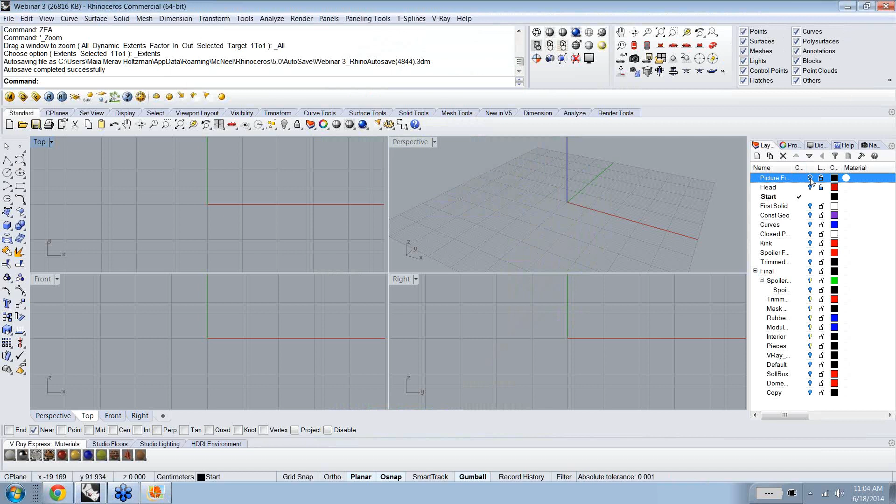I'm going to go ahead and jump into my Rhino file right now, and I'm just going to move this over because it's a little bit distracting. All right. So the first thing that I've done here is I've set up my picture frames, which, if you've seen my webinars in the past, you know that I like to do. I like to model using a reference point, even if it's a sketch or something like that. And for this particular exercise, we are going to be doing some solid modeling using deformable shape.

So I'm going to start in my right view here. I'm going to open up this viewport, and I'll go to my solid creation menu here, and I'm going to create a sphere, center radius, from 0. The sphere is going to have a radius of 43.

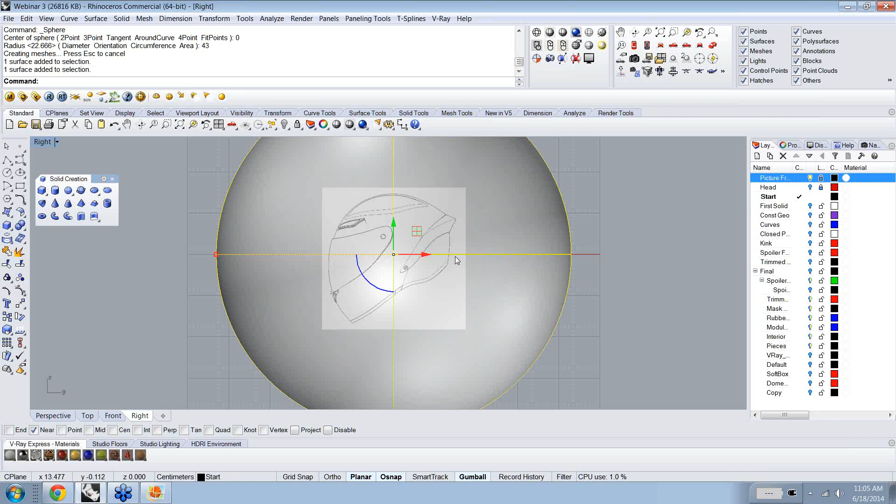And you'll see that I just created this sphere with that particular radius, and if you notice, I have a seam running along the right-hand side of the sphere. So before I do anything else, I'm just going to rotate that sphere 45 degrees, and I'm going to scale it down to approximately the size of my helmet. So something like that for now. Just bring it in a little bit more, not like that.

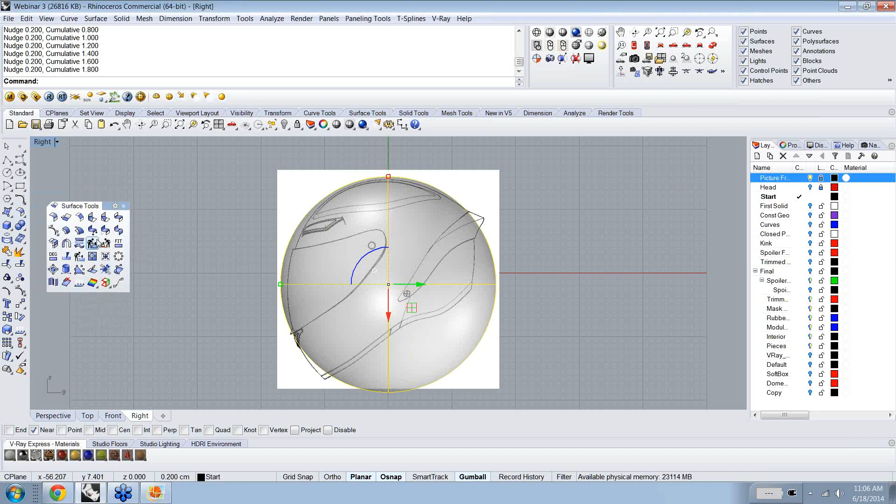I'm going to rebuild this sphere now in order to make it deformable. So either in my surface tools menu here I can rebuild, or I can just type in rebuild. And I'm going to assume that you guys don't need me to tell you where the icons are for this webinar, because otherwise we will get really bogged down. But in order to make this deformable, I'm going to change the degree of curvature here from 2 and 2 to 3 and 3.

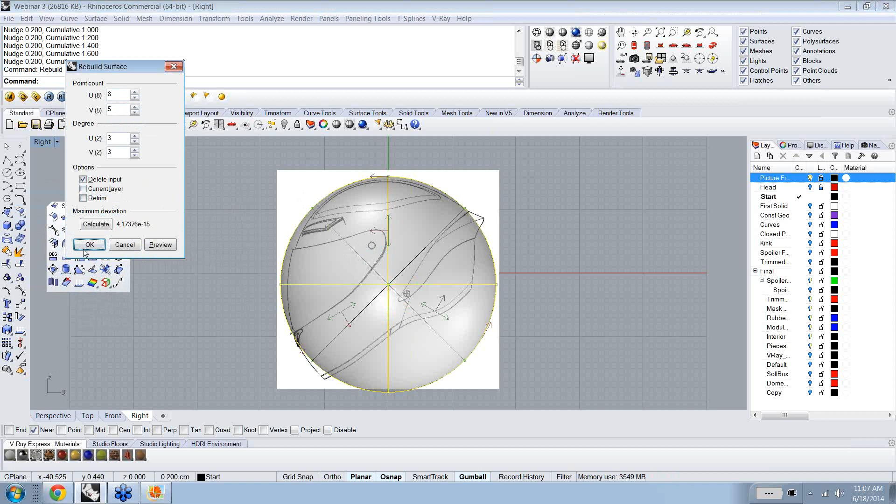And for the point count, I'll leave the point count at 8 and 5, and I'll see what happens in terms of adding points as we go. So I'll say OK now. And then I'll hit F10 to turn on my surface points here. So the first thing I'll do now is toggle my front tab to go into the front viewport, and I'm going to start deforming this shape.

And the initial thing that I want to do before I start trying to model it is I want to move this seam that I've placed at the bottom completely out of the way of what I'm going to eventually be modeling. So I'm going to select all of those control points there, and with my gumball on, I'm just going to drag them down and away from my shape.

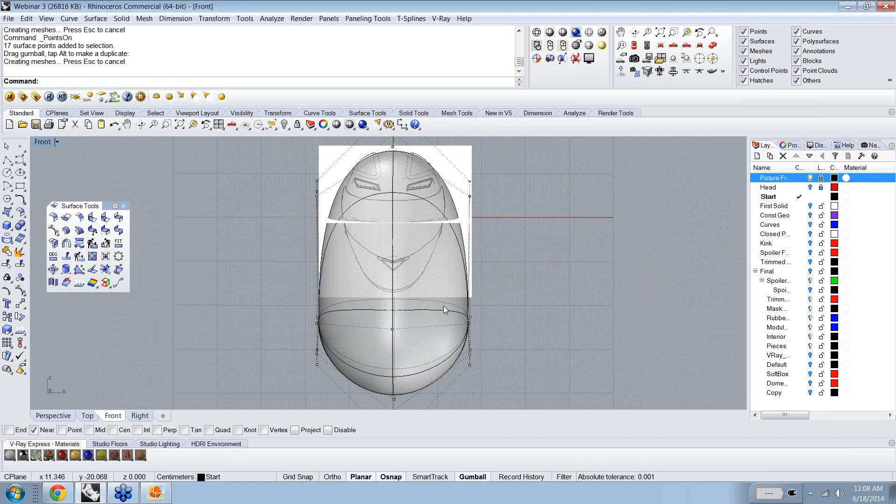So basically what I'm doing is I'm limiting this seam's interference with the surface modeling process. The seam can make little indentations and strange results, and I don't want that to happen, so I'm moving it away. That may be a little far. Sometimes you might want to move it only slightly down. But once I've got that moved down like that, then I can grab these and I can start to scale my shape in a little bit.

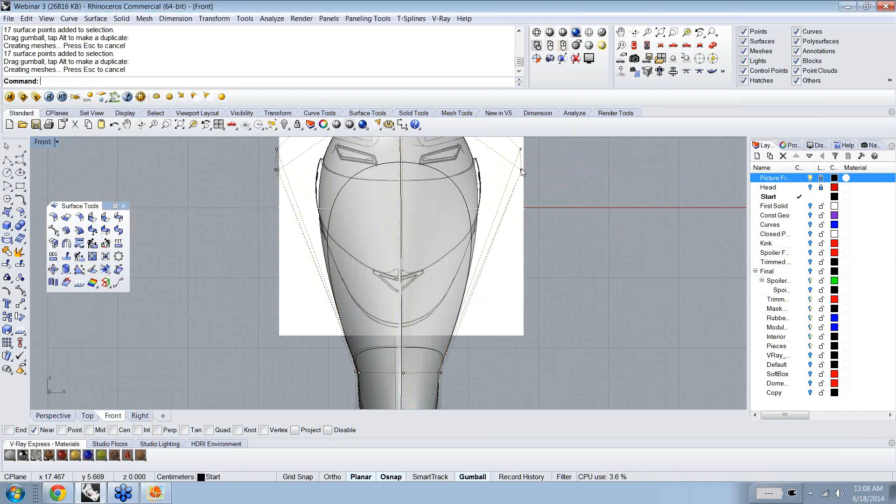I can go ahead and maybe move these down a touch like that. And then I can adjust the top pieces like this. Right. And you can see how quickly we start to get the shape that I'm trying to achieve. I mean, it's pretty amazing how quickly that happens.

Now if I toggle the right viewport tab here, and make this plan view again, we can start doing the same thing in the right view. So I'm using my scale handle on my gumball here to adjust the points that will become the basis for the shape of this. And when I get to a point where I no longer have as much control over this shape as I'd like, the next thing I'm going to do is insert a knot, which is going to add some information to this surface and make it a little bit easier to adjust.

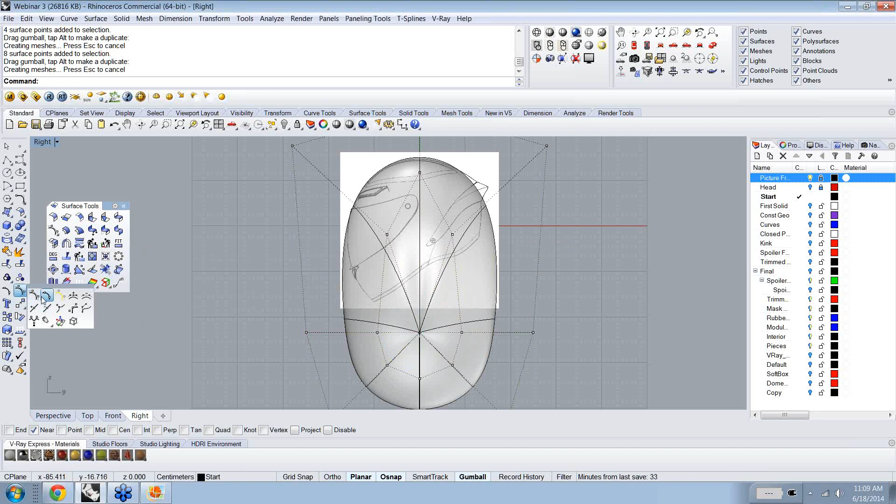So I'll go to insert knot, and I'll select my surface. And you see that right now the knot is not actually going in the direction that I'd like it to go in. So I'm going to toggle that knot. And now you see that it's going to run along the surface here. And I'm going to click once there and maybe again over here, hit enter.

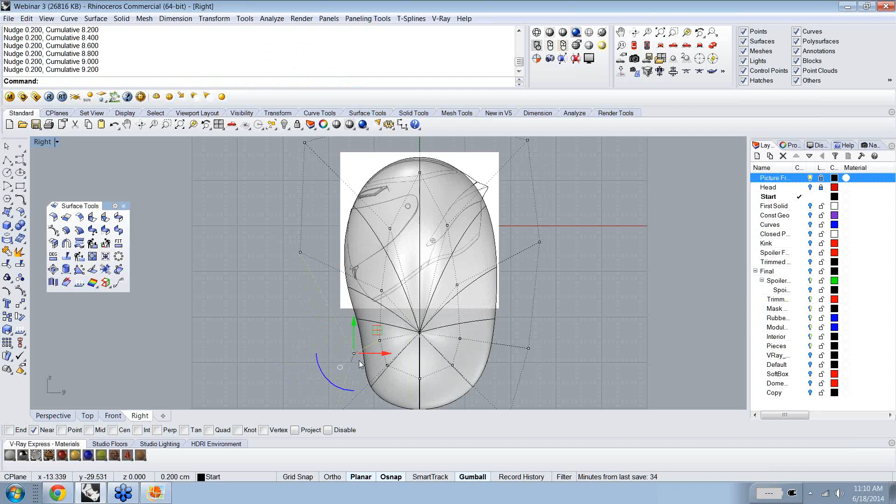And now, because of those knots, I can start to drag the surface in, and the original control point is holding itself away from the surface so that I can adjust the surface even more carefully like this. Okay, so it's pretty cool actually. I think a lot of people have a tendency to think of Rhino as being really limited when it comes to this kind of mushy modeling, and it's not. We can really do a ton of stuff.

So at this point, I'm going to pop over into my first solid layer, which I've already prepared here, just because of the time constraints. So I'm going to escape out of my control points.

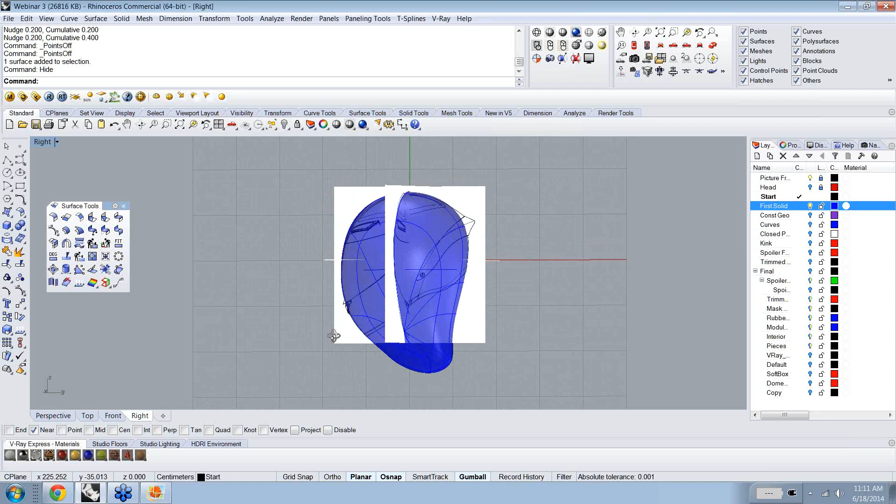I'll hide this, and I'll turn on my first solid. And you can see actually that in this case, my final result looked like this. Let me change the color so you guys can see it a little bit better. Let's make it blue. So this is my first solid. And you can see I've really gotten pretty close to the shape of this helmet. And what we're missing now is this little back end here.

So before I do anything else, I'm going to insert not a knot anymore, but now a kink, which is going to allow me to make a crease in my surface. So I'll go back into my points on menu here, point edit, and I'll go to insert kink, and I'm going to select my surface again. And again, I'm wanting to insert it in the opposite surface direction, so I'll toggle. And I'm just going to put it right about there and hit enter. And I can see that it's right here.

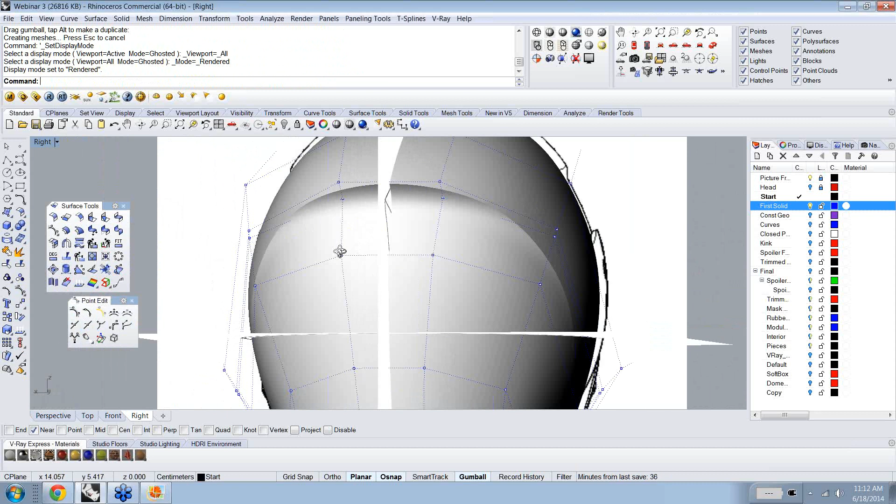Now I'll turn on control points for my surface. And you can see that if I window select this point and I start to drag it, now instead of getting that nice smooth shape that we were getting before, I'm actually getting a crease. And if we look at this in the rendered view, just for the sake of understanding what's happening here, you can see that I'm pulling control points and it's giving me this really lovely definition here. I mean, this is so much fun for making all kinds of stuff, particularly industrial design shapes.

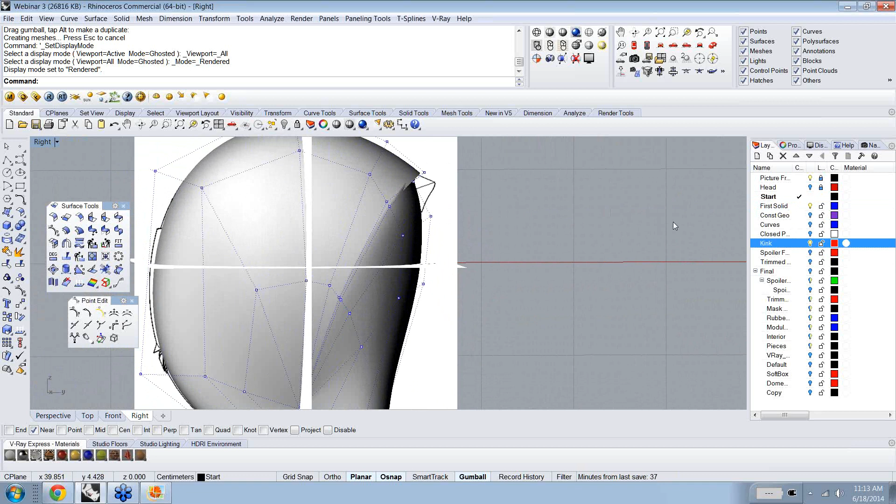And you can see that because I didn't grab all of the control points, it starts to diminish in terms of the crease as it goes down on the surface here. So that's basically where I would leave this. In the case of making this for real, I would have copied this because I also need to create this portion here of my helmet, which is a separate element. So I'm going to go into my next part of this. This is the kink that I created for the actual webinar here, and it has a little bit of roundness at the end. And it's a little bit more defined as it goes down.

And now I'm going to turn on my spoiler surface. So what I did was I took two surfaces from the original rounded shape. I made one kinked surface that was just like this, and from the second copied surface I made another spoiler surface that looks like this. So let's turn off the kink for a second. Let me go back into my ghosted display mode so we can see what we're talking about here. I have this surface here, which is going to be used only to make the spoiler, which is this plastic element that goes on the back of the helmet.

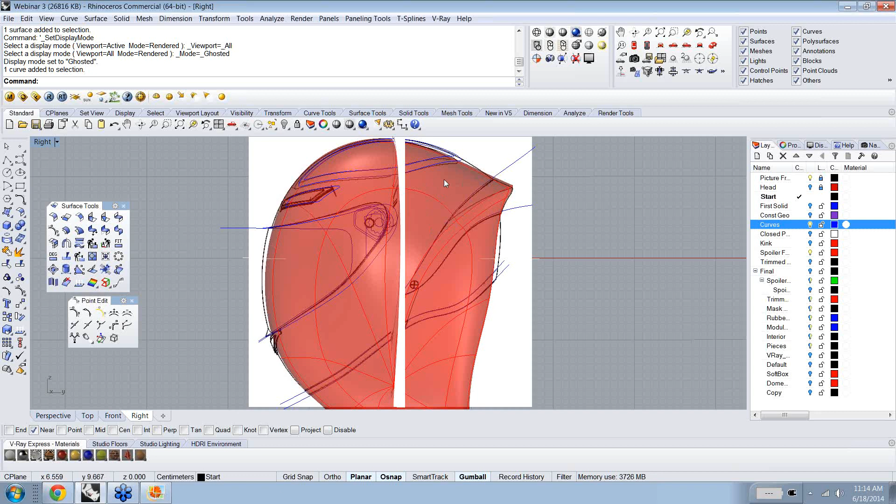And at this point, I'll start turning on my curves layer. I have all my curves in place here. You can see that this is my curve that I'm going to use to trim away the excess from this exterior portion of the helmet. So I'll select this, and I can now turn off my picture frame. I'll select this curve here.

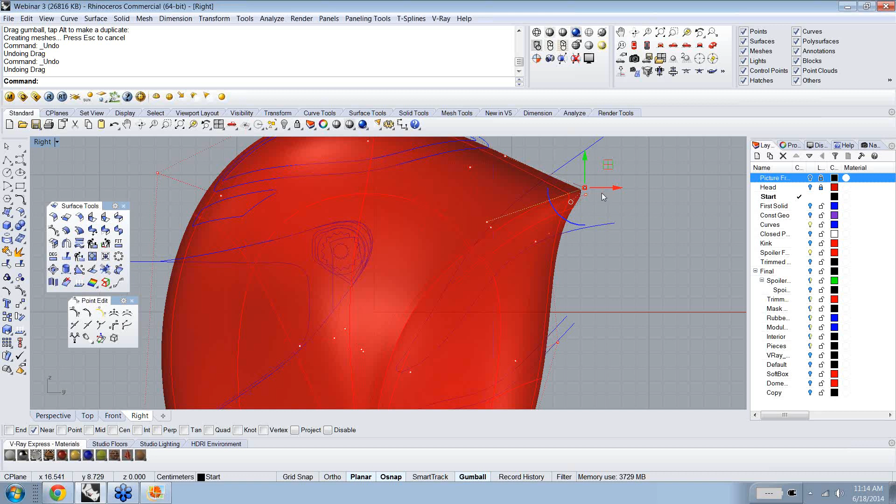And just in case you guys were a little bit confused about the control points and how I got that roundedness, once I moved this edge here out, and that's the kinked area, in order to bring a little bit of that roundness to the bottom, I just started dragging this other control point, which is not part of a kink. And that gives me that nice rounded quality there. So just dragging and pulling, moving around your model, looking at it from the top, right? So if you see that the top is working properly here, shape-wise, great. If it's not, start adjusting again, control point editing, until you get the shape that you like.

One thing that I always tell my students, and that I will tell you now, is that instead of picking individual control points, you should always be thinking about window selecting a group of control points. That's how you're going to get better control, and that's how you're going to get smoothness. And if you are not constantly taking a look around your object and making sure that it's symmetrical, if that's what you're trying to achieve, you're probably going to find yourself with something that looks very blobbish at the end.

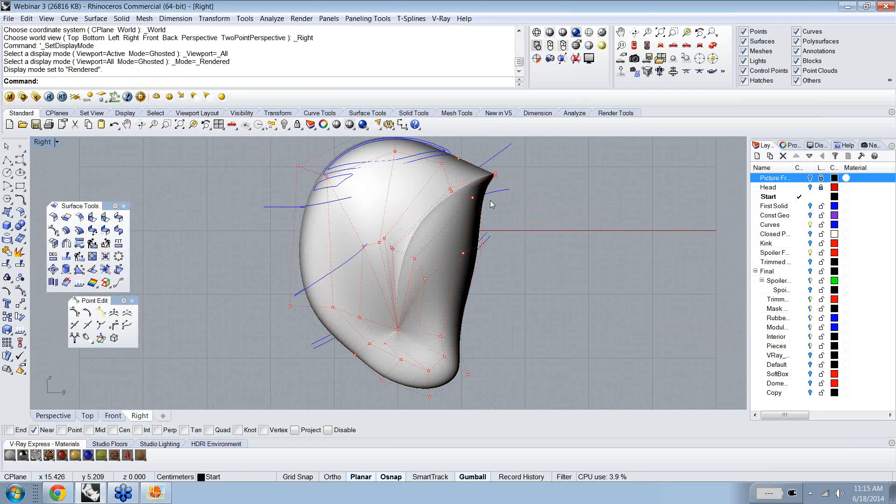So constantly look, toggle between your rendered view all the time, because your rendered view will show you things like this little element, which in this case is not an important thing in this model, but could be if we were worried about this area where the seam is affecting the rest of the shape.

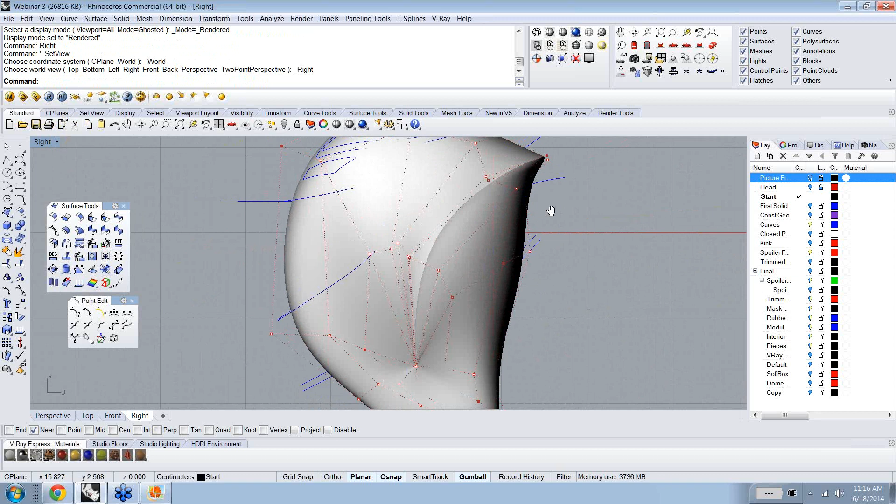Keep going back and forth between rendered and ghosted, or whichever display mode you like to work in the most. I like ghosted. So we're in our right view. I'm going to turn my control points off, and I'll go back into my ghosted view. And I'm just going to go ahead and, using this planar curve, which I built right on the C-plane, I'll do the trim command. And I'm just going to trim away the excess.

Okay. And now I'm left with a surface that, as you can see, is not impacted by that little bit of crease that was not very pretty, because we didn't want to use that portion of the surface anyway. So we've got that, and we're going to go ahead now and start putting together some other pieces of the puzzle. This can be offset. So I'm going to offset surf, and I'm going to offset this in.

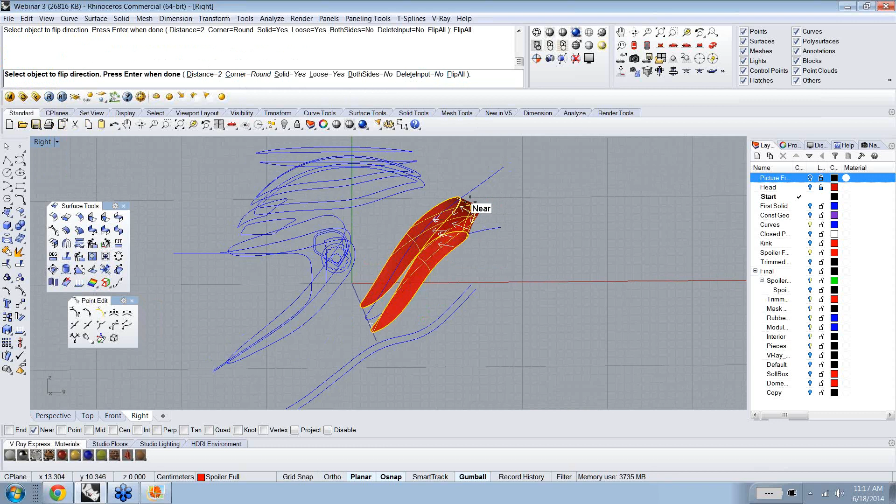So flip all. When you have a surface and you like the shape of it and you're using the offset command, be careful to be thinking about it in terms of doing an offset in, because most of the time this shape will be a little bit changed if you offset out. So we want to sort of hide the offset portion. I'm going to go ahead and do an offset distance of 0.175. I'm working in centimeters right now. And you see now that I have created this solid offset, solid yes, both sides no.

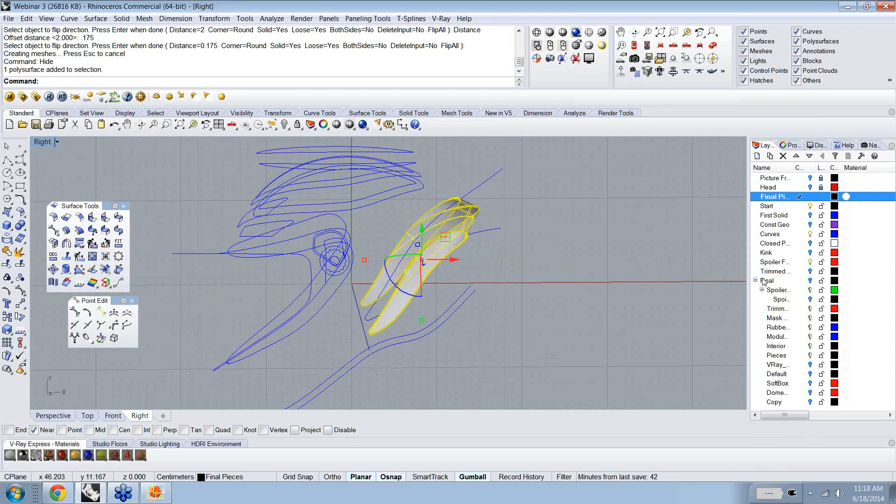If I get rid of my surface here, I have this portion of the helmet ready to go. So I'm going to place this onto a new layer. I'll call that layer final pieces, just because I have actually my final grouping of objects finished here for the rendering process. But I'll go ahead and hide that. All right, change object layer.

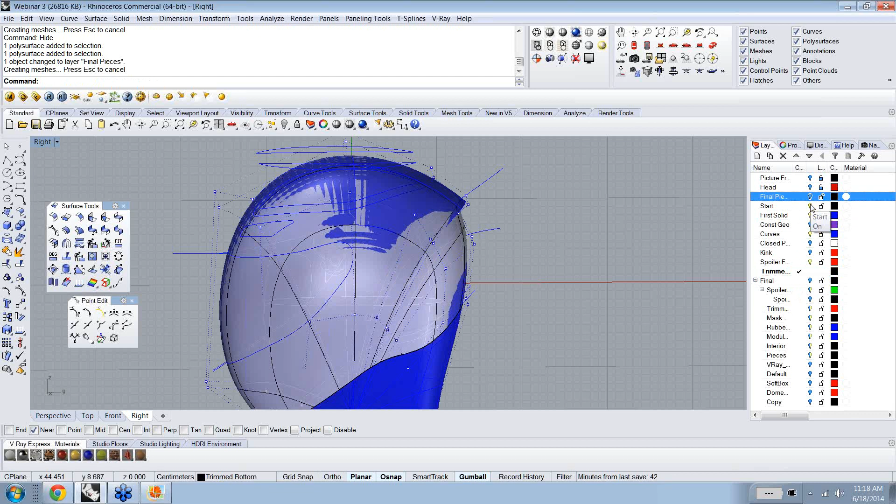Okay, and then I'll go ahead and change to a different, let's see, that's not the one I want. You know what, we're going to go to this one, and we're going to turn off final piece, and we'll turn off these two as well. Okay, so this was from the beginning of me working, and I initially thought that the process that I would use would involve me offsetting this surface, and then later on I realized that really this is better achieved by doing a different sort of command.

So I'm going to actually use a command called untrim, and I'm going to go back to the original shape. Okay? If you ever trim away a portion of a surface, you can use this command if you have made a mistake to bring your surface back to a pre-trimmed object, like that. And so the first thing that I'm going to do, rather than trimming, is I'll do the wire cut command. I'm going to select this outer curve here, and I'll type in wire cut. And I'm going to select my object to cut and press enter.

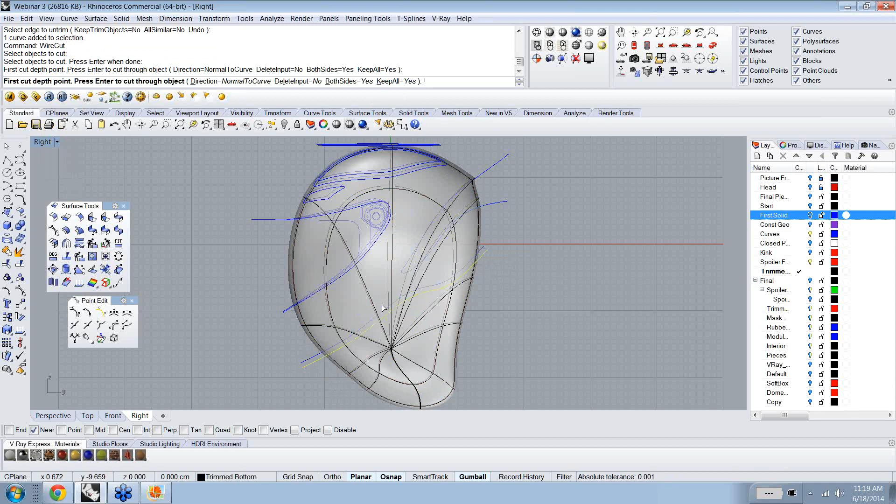And I always keep wire cut toggled to keep all equals yes, just because for me it's easier to just figure out what I want to get rid of after. But you can toggle it to keep all no, and then it will prompt you. And the reason why I'm wire cutting here, for those of you that don't know the command, is because instead of making a trimmed surface that's hollow inside and has no volume, I've actually created a solid. You can see that there's another surface here that's been created perpendicular to my C-plane.

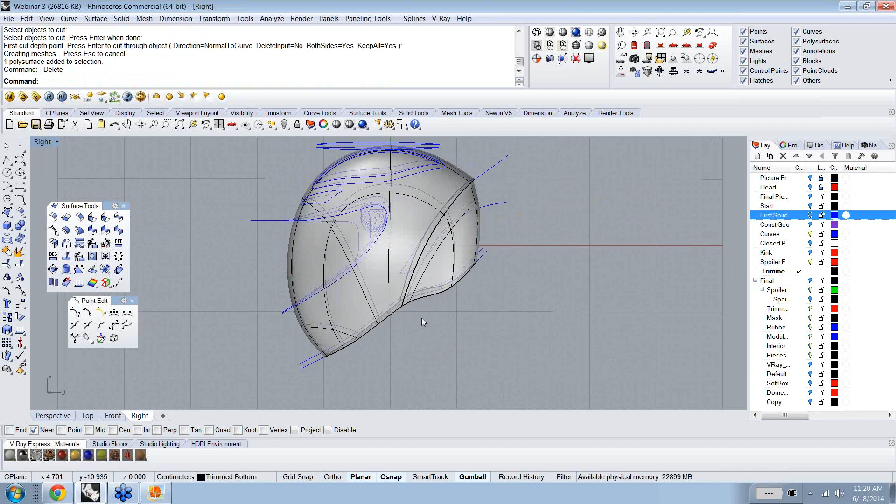So now I have a solid to work with, and the next thing that I'm going to do is I'm going to make a copy of this object. So I'll copy it in place by right-clicking over the copy icon here, or by typing in place, which is the command. And then I'll just go ahead and lock one of these copies. So lock. I have one still available to me.

And with the locked copy, I'll go ahead and use this curve that I've created, not that one. Let's go ahead and use that one, to trim away the excess of that polysurface so that I'm left with just the shield, basically, for the eyes here. And then I'll hit enter. Great. And now I'm going to offset this. I'm going to offset it in two directions.

So I'll do the offset surf command. Since it's a single surface, not a polysurface, I have the option of offsetting both sides, and I'm going to go ahead and do that. Both sides, yes. And distance, 0.175 is fantastic. I'm going to accept that. Let's see how that looks now.

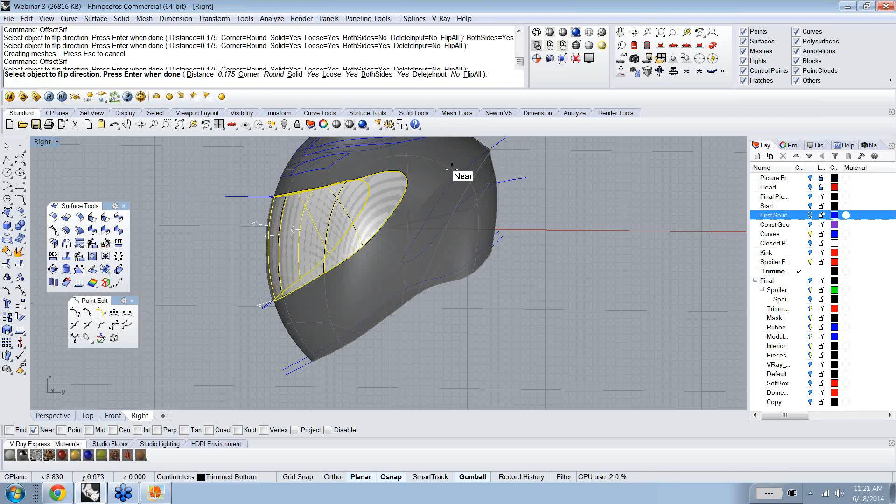That looks pretty good. I might want this to be slightly more offset, but for this particular portion, I do want it to be more offset. So I'm going to redo that, offset surface, both sides yes. Let's say distance is going to be 0.3.

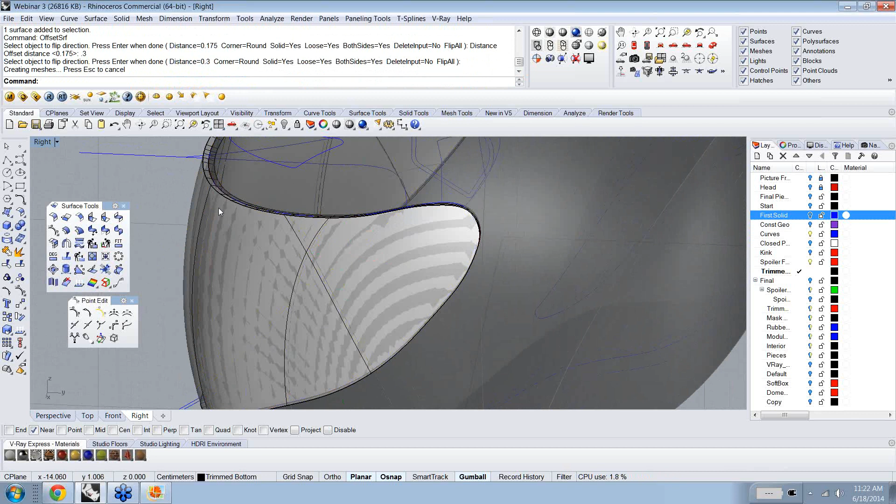Now the reason I'm doing the offset both sides right now, and I have delete input toggle off, is because I'm going to use that surface again. I'm doing both sides because sometimes I'm going to use this to do a Boolean difference with, and sometimes if I have taken a surface from another poly surface and the surfaces are sharing the exact surface space, the Boolean difference command doesn't work as well.

So I'm going to unlock now, and using this poly surface that I just created, I'm going to do my Boolean difference command. I'll select the surfaces or poly surfaces to subtract from, that's my helmet, press enter. And then the surfaces or poly surfaces to subtract with, delete input, let's say yes. I'll use the visor and enter.

Okay, now you can see that I have that surface there. If I quickly hide it, you'll see that I was able to cut away, leaving this helmet solid still, a portion for the visor to sit inside the helmet. So I'm going to undo that.

Now I want to give this a rotation because I'm going to offset this outwards now. As we know, when you have these visors for a motorcycle helmet, they need to actually slide up and over the front of the helmet. So I'm going to go ahead, I think, I'm not sure if I left it there or not.

But at some point, yes, I have a tiny curve that's exactly 0.33 centimeters, 3.3 millimeters I think, and I'm just going to go ahead and rotate that in.

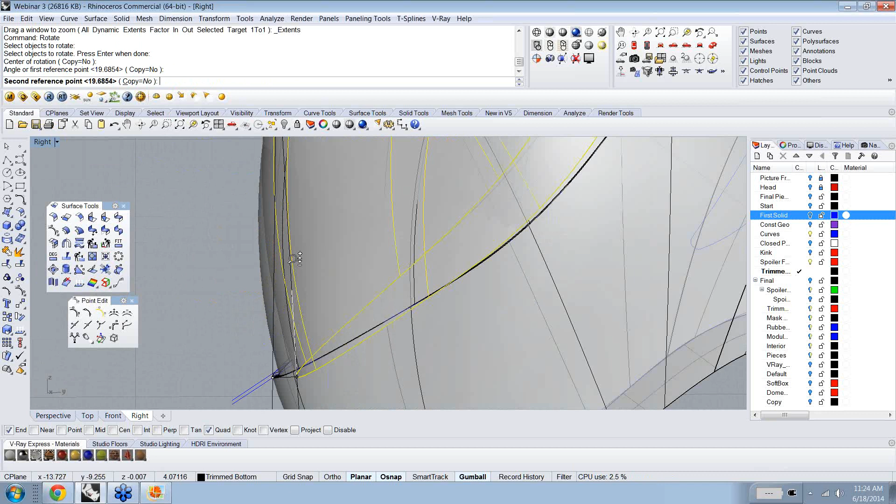Using my rotate command, I'll select my object. Center of rotation, let's see if I can find my quad point up here. It's either going to be a quad or an end, but it's quad. Next point is quad, and then the next point is going to be end. So I'll make sure that my end osnap is toggled on, and let's zoom in there and find that end point.

Now when I go ahead and do my offset again, I'm going to offset this, offset surf. Now I want a distance of 0.33, so I'll say distance 0.33, make sure that solid is toggled to yes. And now I can say delete input yes, because I don't want that surface anymore. Enter.

Okay, so now I've just rotated it enough, and this is, frankly, the truth is that for this exercise we're just doing a design. We're not really doing the engineering of this helmet, and if I were engineering this helmet, we would need some other elements in order to make the measurements correct. But this is good for visual, for doing the rendering.

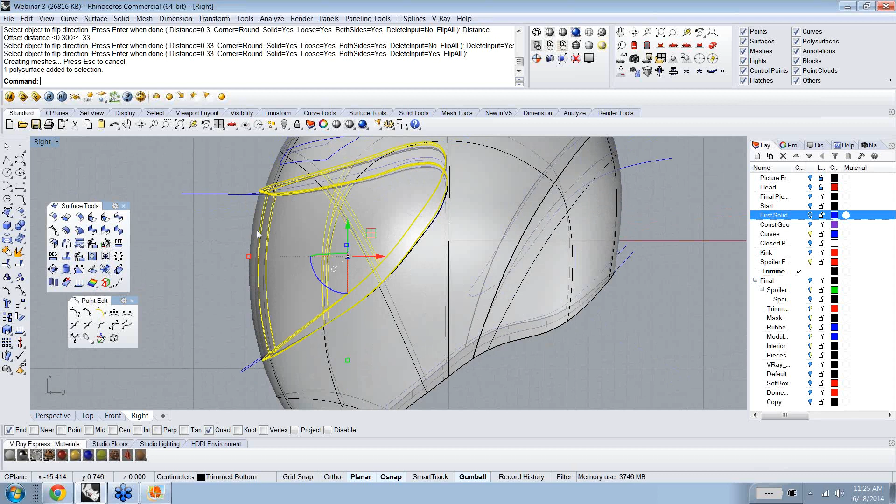So I'm just going to hide this on my final pieces layer, change object layer. And now I'm going to go ahead and shell this object. So instead of offsetting surf, I'm actually going to hollow out the inside with the shell command. Shell thickness is 0.25, enter. And I'm going to select this face at the bottom here to shell, enter again.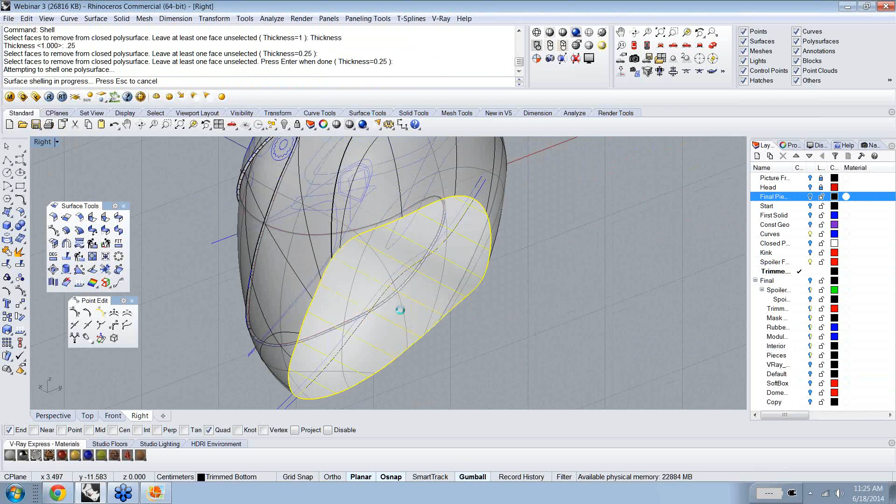And as you can see, I've now hollowed out this shape, right? We have a kink in place, or a crease in our surface, that is fine. We have this indentation where I Boolean differenced to my object, and everything is hollowed inside, right? So we have this offset of all of those surface elements inside of the shelled object, which is really cool and time-saving, I think.

So I'm just going to make this plan again so I can see what I'm doing a little bit. And I'm going to go ahead and select this curve here. This curve represents the actual area out of which a person would see, because right now this is blocked off. So I'll again use the wire cut command, wire cut.

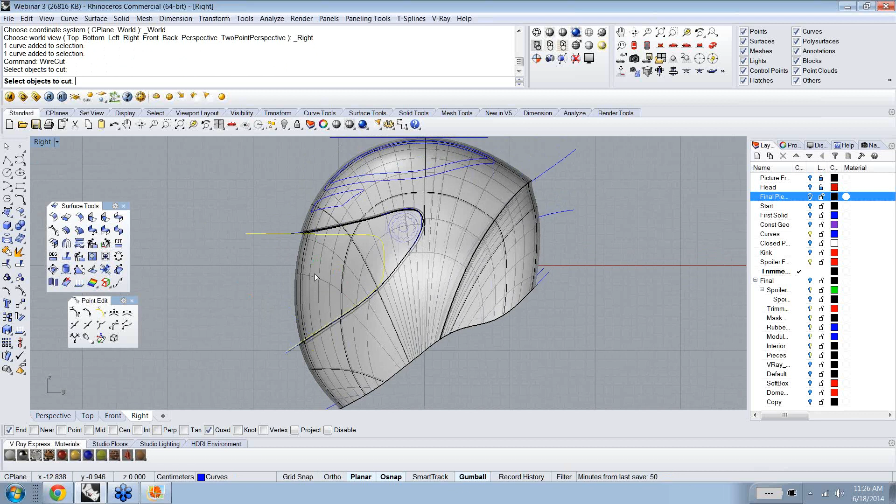And I'm going to select this object and hit enter, and enter again. And now delete, and I'm left with a solid, right? Okay, all of this is a solid object. It has the wall thickness that I wanted it to have throughout. It has all of these different sort of dimensions and modulations throughout the helmet, and it's starting to look like an actual, you know, a real helmet basically.

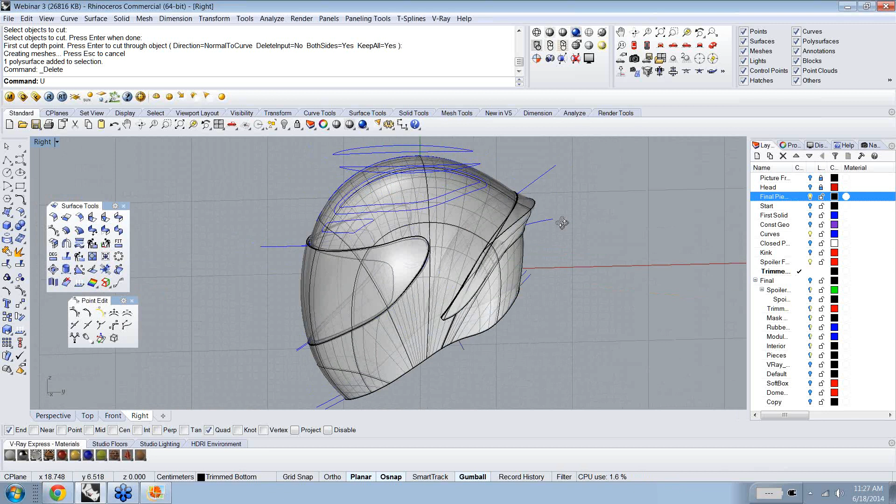So if I bring back my final pieces now just to take a look, right, we see that we are starting to get somewhere. We have this spoiler on the back, although this spoiler is intersecting a little bit. I would have to adjust that.

I'll cheat for a second. I wouldn't do it that way for real, but just so you get the idea, and also the face mask. And I'm just going to turn those off now.

We are going to go into the top area, and we're going to start playing around with how to make some more and different types of modulations on an object. So I'm actually going to delete these curves, so we can start over again now.

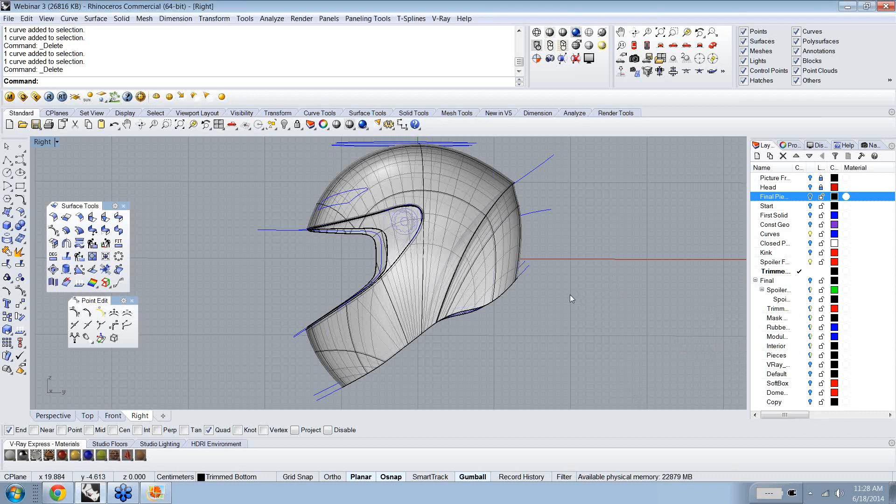Maya, I have a question right now for you. Yes? There's a question that's very pertinent. How did you get that surface? That's a- this question- surface? Yes, which surface? The question says, how did you get that surface? So I don't know what they're referring to, but I think it's the surface here.

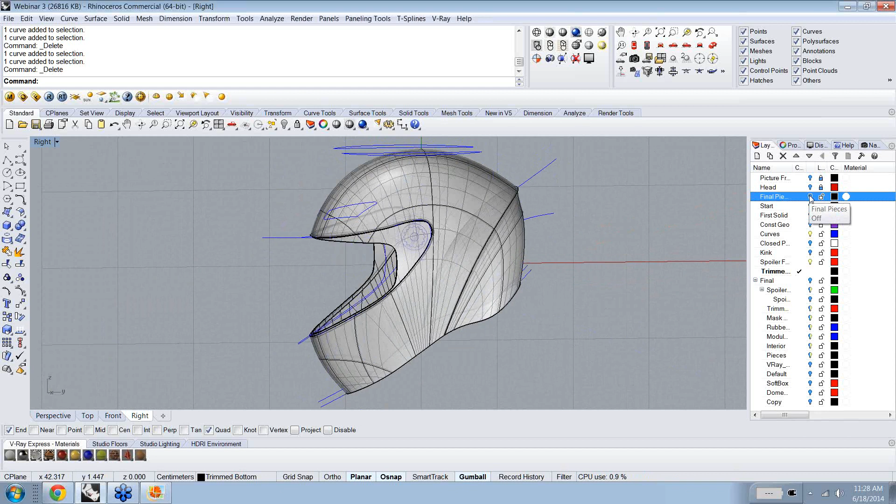So maybe if you didn't come in at the beginning, I had this first solid object that I modeled using- let's see if I can just hide this for a second. Where are we working? Okay, so we had this sort of shape, which we did using surface modeling techniques with control point editing, and that's where that original surface came from. I haven't really used any other surfaces, so I'm thinking that's what the person is referring to.

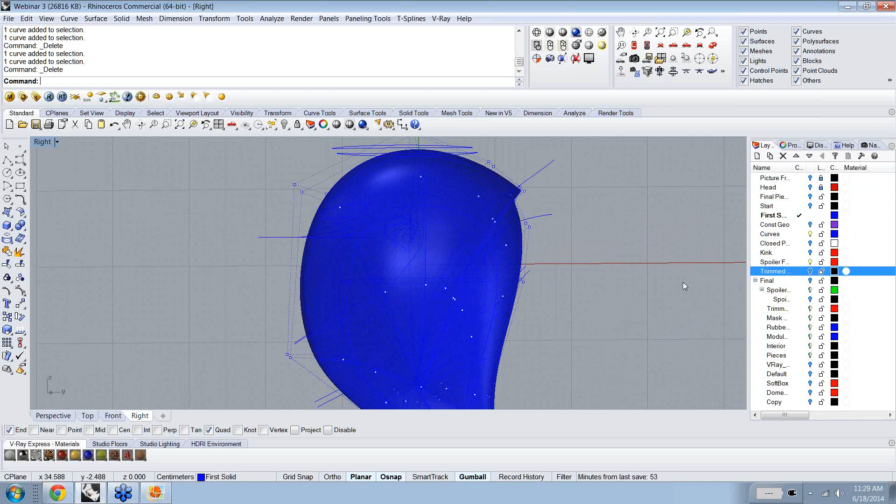Can you hear me? Hello, Barbara? Yes, Maya, sure. Oh, Maya, okay, great, can you hear me? Yes, yes, I can of course. Keep asking questions away, and we'll leave some time at the end.

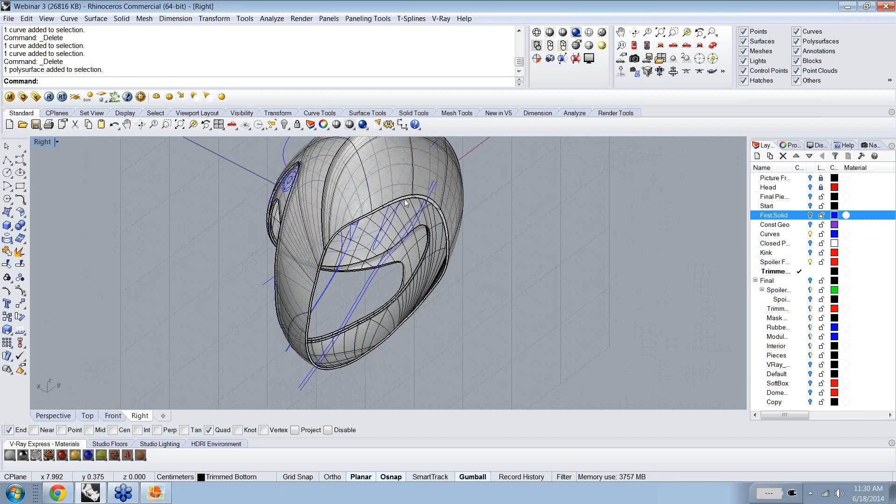Keep asking questions, absolutely. So there's a poly surface here, just for clarification. There is no actual single surface left here. These are all poly surfaces, and in case that's confusing, the reason why is because the shell command takes into account the exterior of an original surface, and makes a secondary surface, sort of like an offset solid. In my opinion, in simpler shapes, it often does a much nicer job, so that's why I chose to do it that way. So there isn't actually a surface, this is a series of surfaces that are joined together already.

So I'm going to go ahead and into my top view here, and I'm going to use some curves that I've created previously, right? That's not a curve. I'm going to use the project command to project these two curves onto the top of the helmet. So top, just get into plan view there. It doesn't matter- project takes into account the C-plane, so even if you're rotated around in space, it's always going to project parallel to your C-plane. But it's nice to see what you're doing.

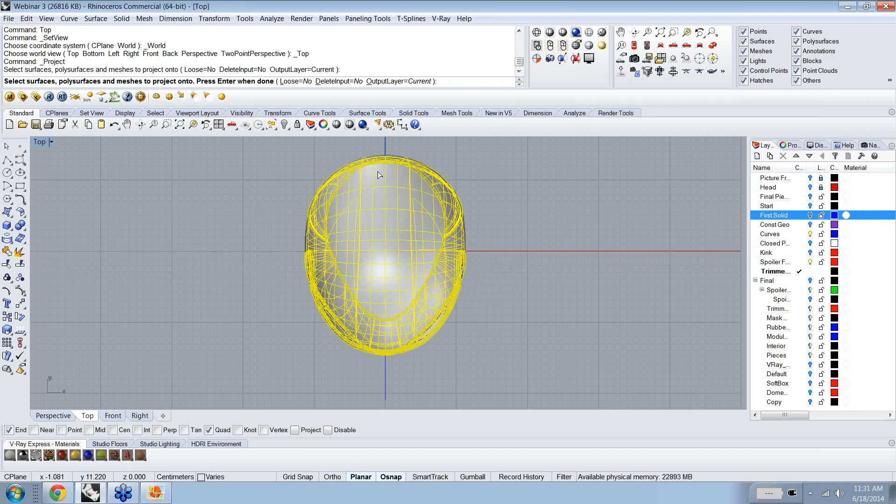I'll go ahead and do the project curves command here, or you can just type in the word project, and then I'll select my object here. You know what? Actually, I lied- I'm going to make a copy of this surface first. So I'm going to do a command called extract surf, and select the top portion of my poly surface. The reason why I'm doing this is simply because I don't want the projection to go through multiple layers of a poly surface. I'd rather just project once.

So in this case, I can go ahead and project onto this surface, and since the surface is a single surface, it will only accept these curves one time. Now I'll go ahead and do the project command. I'll select my curves, 1 and 2. We really only need to do this once because I could easily mirror it over. I'll press enter, and then select my surface to project onto, the single surface, not the poly, and hit enter again.

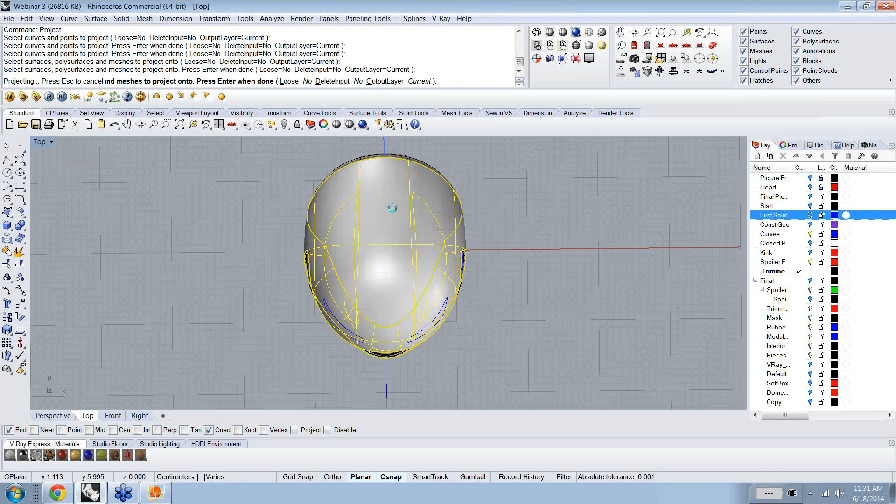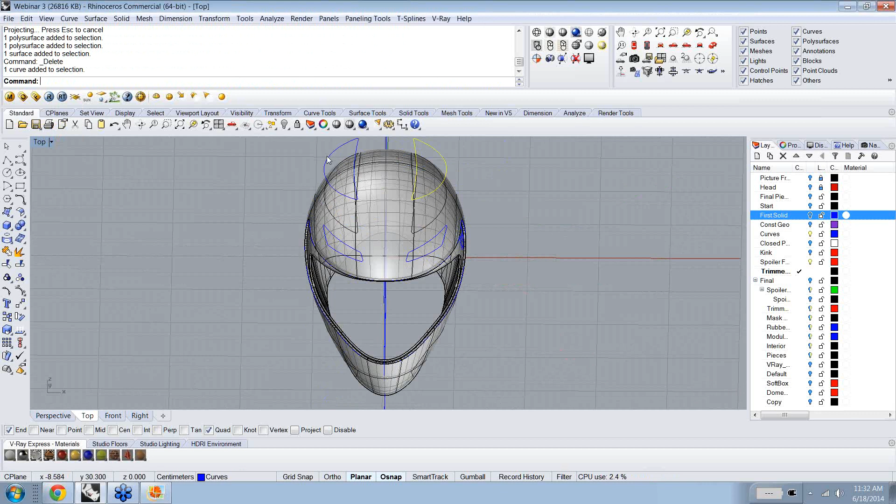And because of the fact that the single surface shares the same exact structure as the poly surface, it's projected those curves perfectly onto the poly surface as well. Now, excuse me, I can go ahead and delete the single surface, don't need that anymore. I'll go ahead and select these two objects- I don't need them, I can hide them for later in case. And I'm going to go ahead and offset these curves.

If I know the actual distance of the offset, that's great. But if I don't know exactly how much I want to offset them, I can also use this through point sub-selection, and I can use that by typing in the letter T. For those of you who never realized you can just type T, that's going to make that through point part of the offset. Once I do my through point command, I can decide where I want my offset to be on the surface.

I actually, you guys, kind of just screwed up. I just realized that I should have offset those above and projected them both down.

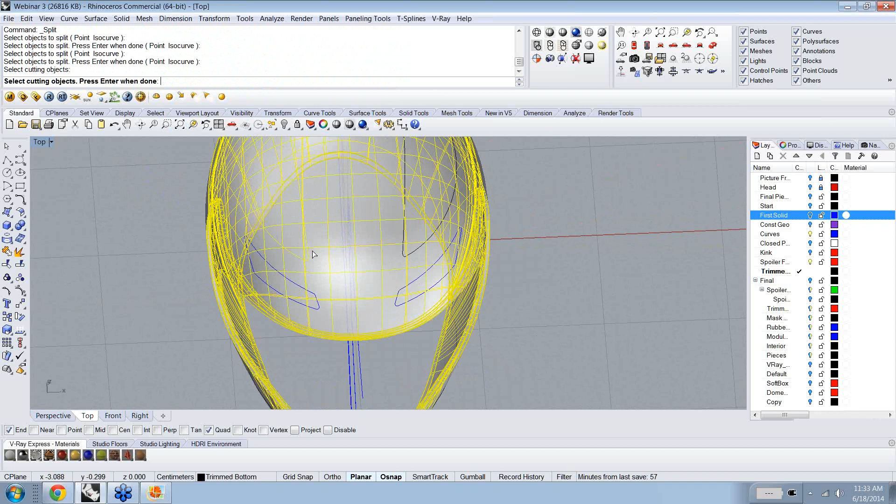But that's fine because I can do something else here, which is I can split my surface with my two curves here, 1 and 2. Actually, I think this is how I did it the first time. And then I can use the edge of the split. So I have two single surfaces now, and I've just opened up this solid.

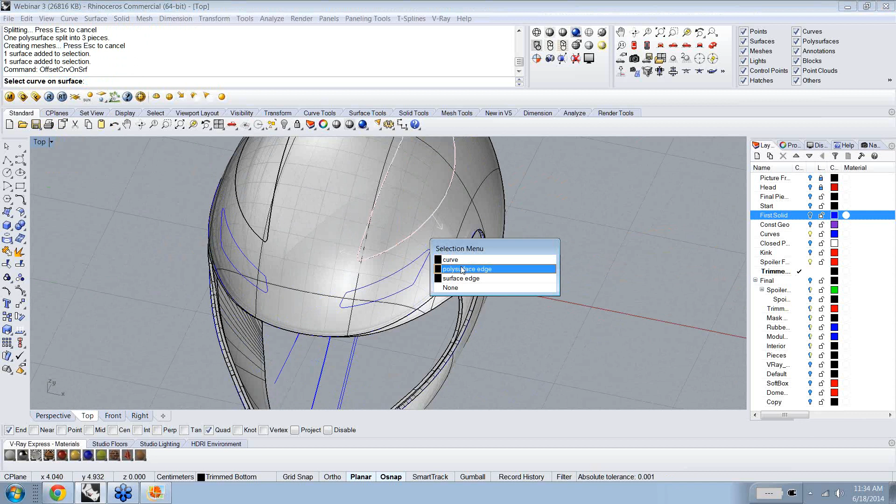And I can do an offset using the offset curve on surface command. So I'm going to do offset CRV on surf. Now I'll go ahead and select my polysurface edge, the one that's facing out. Okay, and now let's say offset distance, in this case, we'll take a look at 0.3, or we can again do through point and decide. So if you have something to snap to, great. If not, then we're going to just do offset curve on surface this way.

Okay, so that's really small. I think I'm going to offset this at a distance of 1. So I'm going to delete that. Select my curve, I'm going to give it a distance of 1. Perfect. And I'll do the same thing on this side as well.

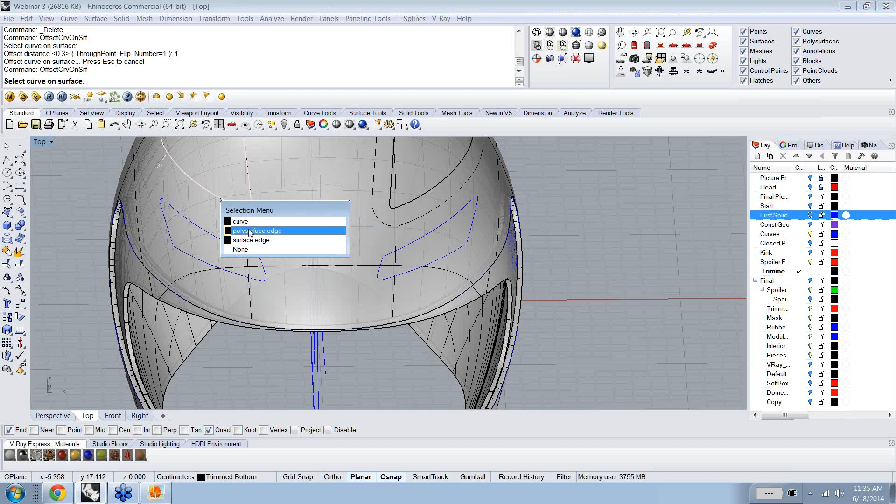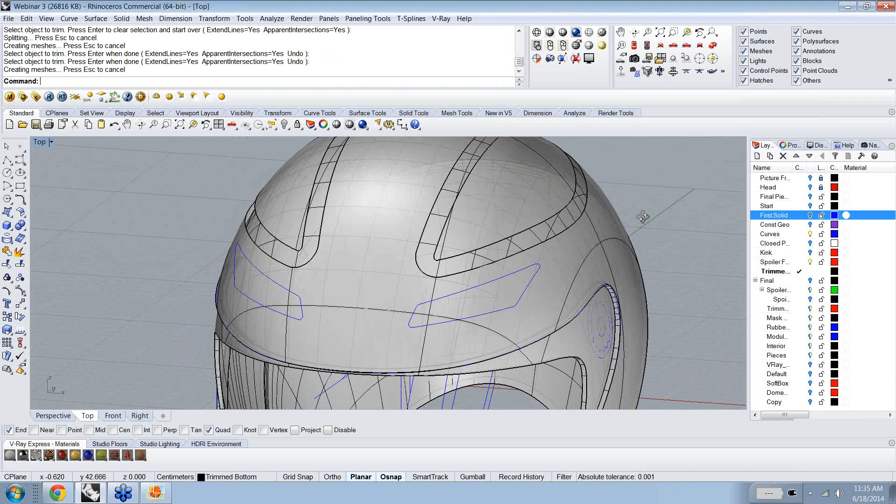Okay, great. And then I'm going to use those two offset curves, which are sitting on my surface, to trim away that interior portion of this surface. It's always nice to find an ISO curve to let Rhino know exactly what you're trying to trim away. So now I have this hollow area here, right?

And the next thing I want to do is actually offset these two surfaces. So I'm going to go back into my front view, and offset the two surfaces. Offset surf, let's give these a distance of 0.4 for offsets. Enter. Oops, one more thing, let's offset not solid. And delete input no, so I'm going to say solid no, and delete input no, and hit enter.

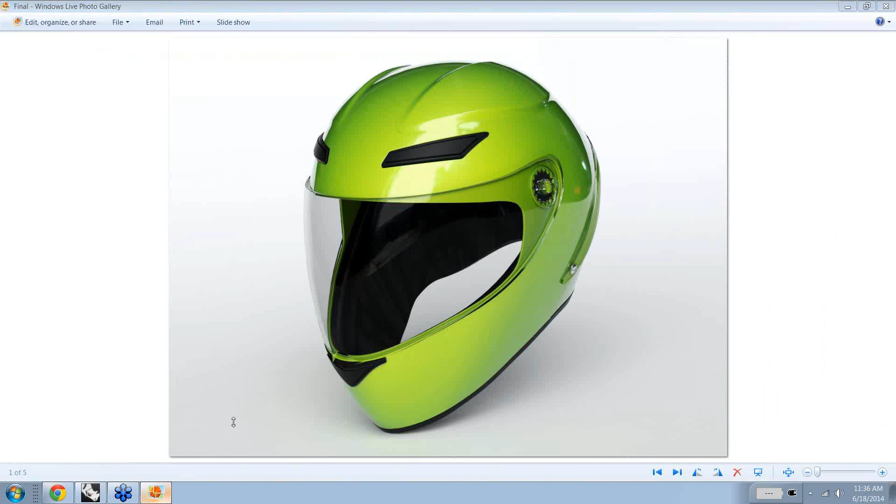Now, before I get into making those, I want to give a little bit more of a possibility for surface curvature continuity or surface continuity on these guys. So I'm going to use the bend command to bring this point of the new surface, or these small surfaces, down to meet the original one. So in my right view...

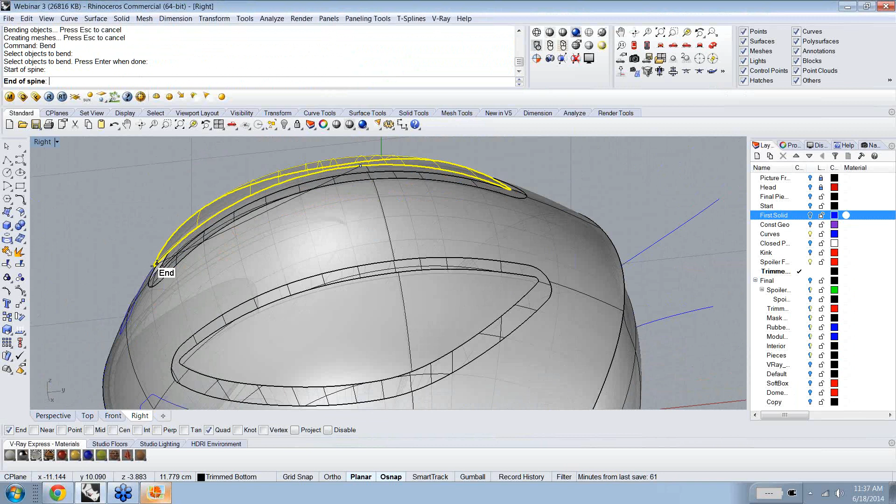I'm going to do bend. Select my object, this, enter. The start of the spine, we can find the quad point here, that's fine, and then the quad point there, and then I just want to snap it to the quad point there. And you see how it just bends down. I'm going to do the same thing on the other side. Quad, quad, if I can get it, and then quad. Okay, that may not be perfect, I think I probably snapped to something else, but that's fine for me.

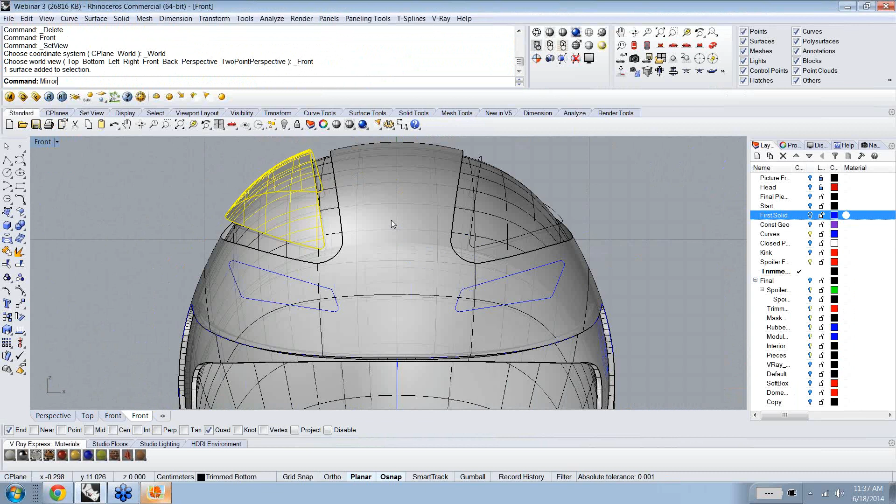And in this case, because we're short on time, I'm going to delete the two surfaces on this side, assuming that I can grab them. And I'll just mirror this surface over the Y axis. So what we have here now is this empty area that's to be filled in.

And we're going to do a command which a lot of people seem to struggle with. I think the reason people struggle with it is because they're assuming it's going to do a lot of the work for them. We need to add a little bit of work. So that's the blend surface command. I'm going to go ahead and type in blend SRF, blend surf.

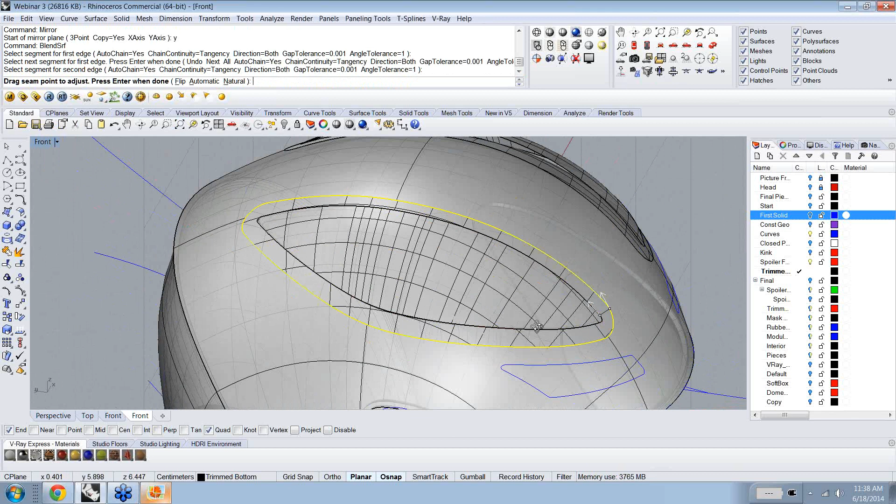Rhino's going to prompt me to select the segment for the first edge. I'll go ahead and select this one. Then, since that entire edge was selected, I'll hit enter, and select the segment for the second edge. I'm going to go ahead and select the exterior one. And you see now that I have a seam that Rhino's asking me to adjust. I like this seam actually here, so I'm going to go ahead and hold on to that one. But I'm looking at this now, and this is a good time to look at your object as a rendered object.

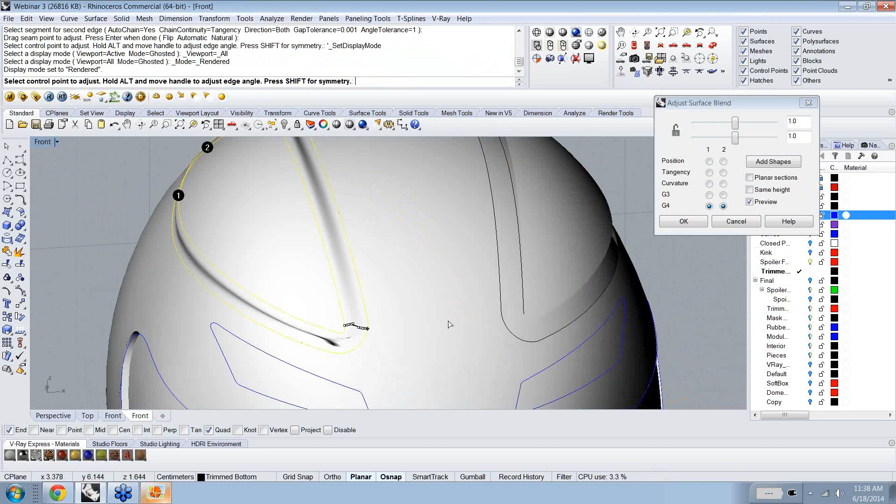I see that it's really a disaster in here, so I need to fix that. So I can use these sliders to adjust my surface, the new surface that's being created, but there's something else that I can do, which is to add shapes. And adding shapes allows me to use my O-snaps to go around, let's say quad. Let's find points on this.

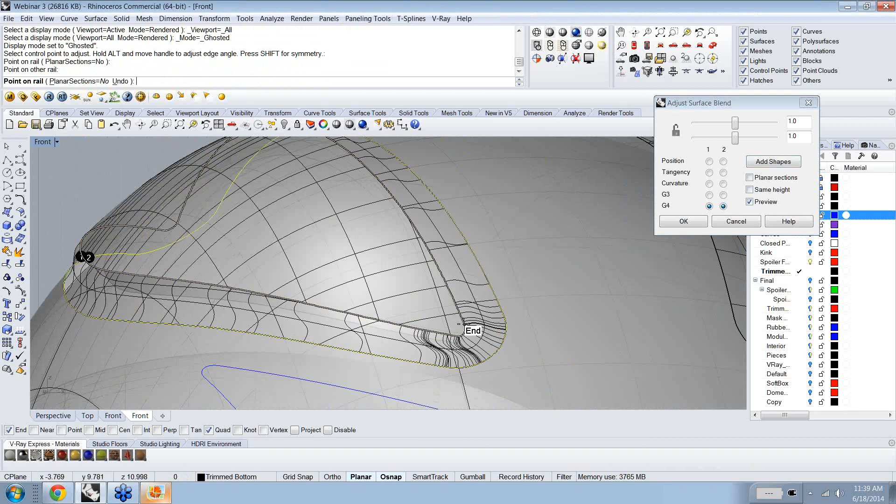The last one I'm actually going to go to just for the sake of this one part. I need to find the quad point somewhere here. Interesting. Weird, it's not showing me my add shapes. There we go, on rail, that's what I want. So I'm going to do quad and then quad. And you see how it starts to resolve itself a little bit there. Let's say end and end.

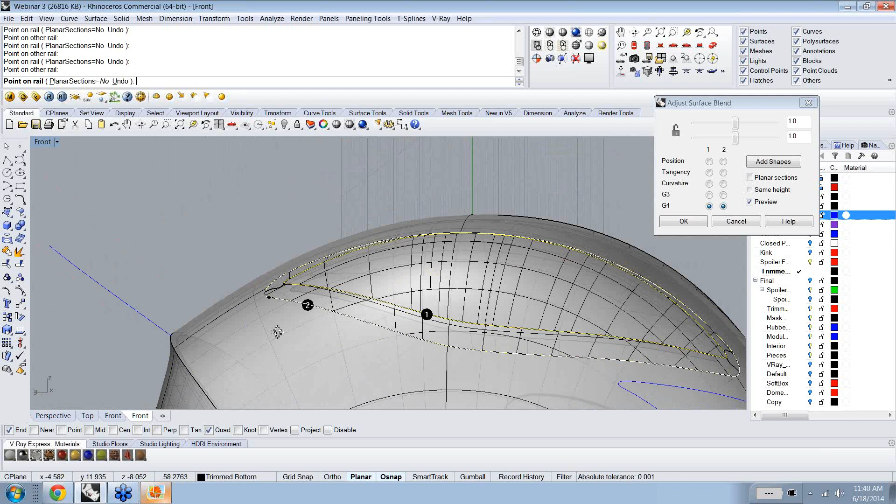Something strange happening here. Quad to quad and quad to quad maybe. Something bizarre just happened there with the preview, so I'm wondering if I did something weird. But let's take a look and see. Yeah, no, not good. So I'm going to go ahead and undo those. And I'm just going to do it really quickly one more time.

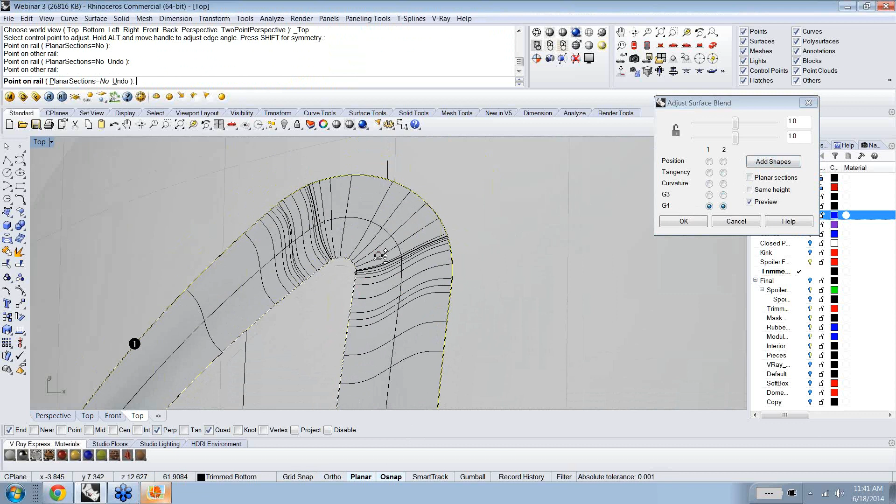And just for the sake of being safe, we can see that this is a mess here. The isocurves are a disaster. I'm going to go ahead and add some shapes. Do I have a project on now? Just snapping to the wrong thing. So it's snapping to some weird things here, which is making it a little bit tricky. I'm going to turn on perp. See how we clean this up? Quad, perp. And all of these isocurves start to resolve out of that mess.

And quad, let's make sure that I'm snapping to the right thing. And actually, I'm just going to turn the curves filter off here. Quad, perp, and quad, perp. Not really sure what I'm snapping to. Okay.

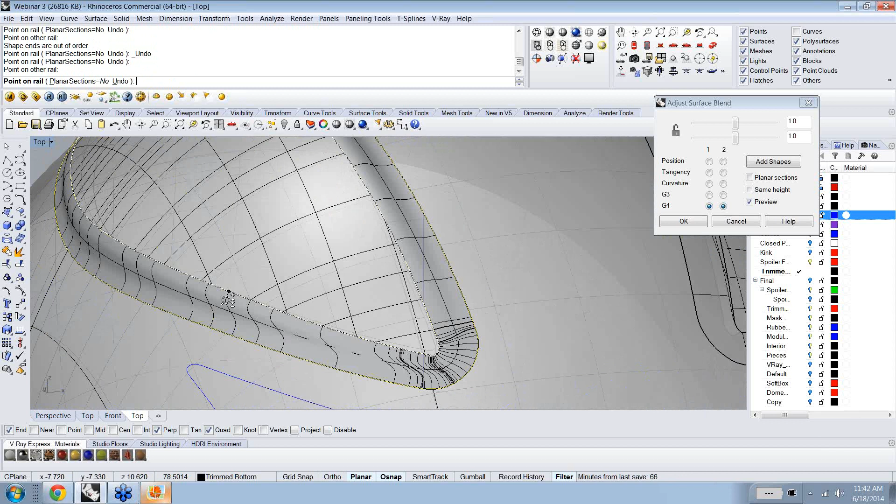Well, anyway, guys, you get the point. The more that we add information, although sometimes it can be to our detriment, the cleaner we get these isocurves that are running around here. Now I can go ahead and decide what sort of curvature continuity I am interested in achieving here. And now is when I'm going to turn on my rendered display mode and take a look and see what's going on with my object.

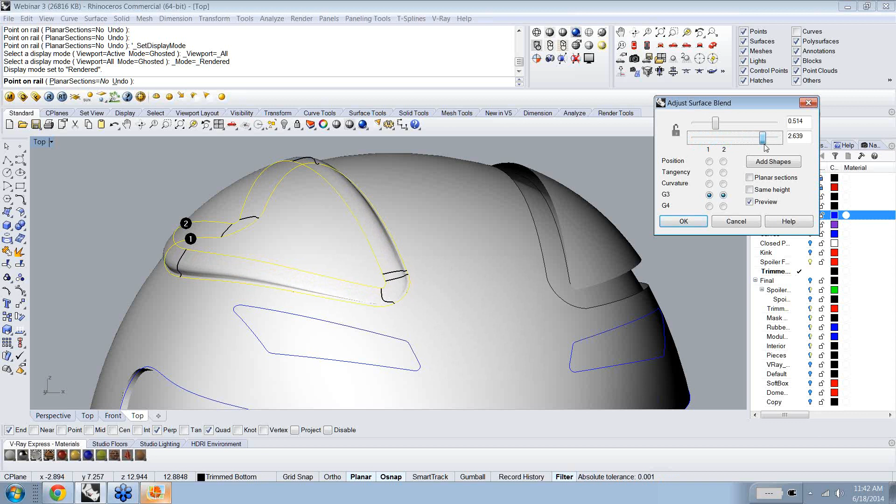So assuming that I'm fairly happy here, I don't see a lot of messiness going on, I can still start to adjust with my sliders just to get some additional bendiness. If I wanted it to be crazy like that, I can do that, right? And anything that you want, you can adjust. You can also adjust these individually.

So if I go into my ghosted mode again here, and I take a look, now I'm done with adding sections, so I'm going to say enter. Now I get my little points here, and I can manually adjust them as well. And each of those will change the relationship between that curvature and the curvature that's here. So pull it in, and very carefully you can go around and do all of those.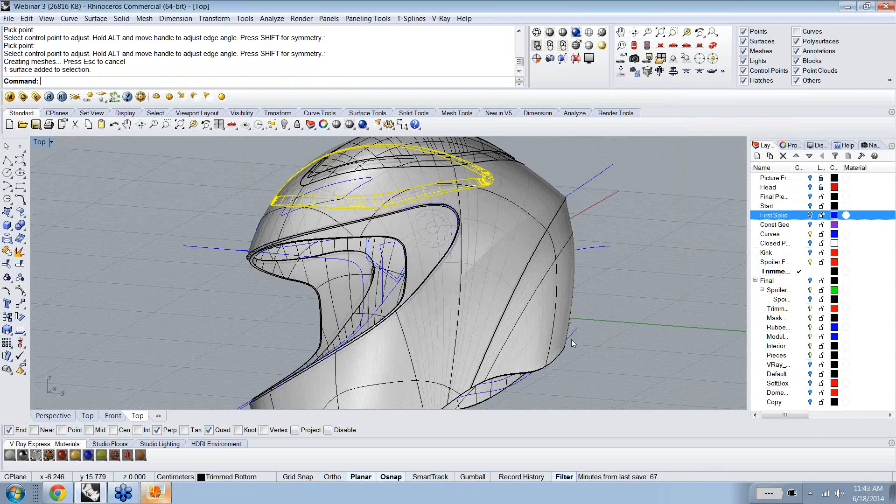It's 11:43, so I'm going to keep it moving along. I'm going to enter to accept. That looks really terrible. But I'm going to go ahead now and talk a little bit for a second. Obviously, this is its own surface. I could mirror that across and join all of this together. And I already have the two elements of the spoiler and the mask or windshield there.

So for pieces like this, these little cutouts here, which I have projected onto my surface, and I have another one that was projected here on the front, I'm going to go ahead again and do that extract surface with the copy option toggled to yes, and then I'll just cut away pieces and I can offset them and use them as cutters, and you'll see exactly what I mean. Right now I'm going to go into my final model and turn all of this stuff off.

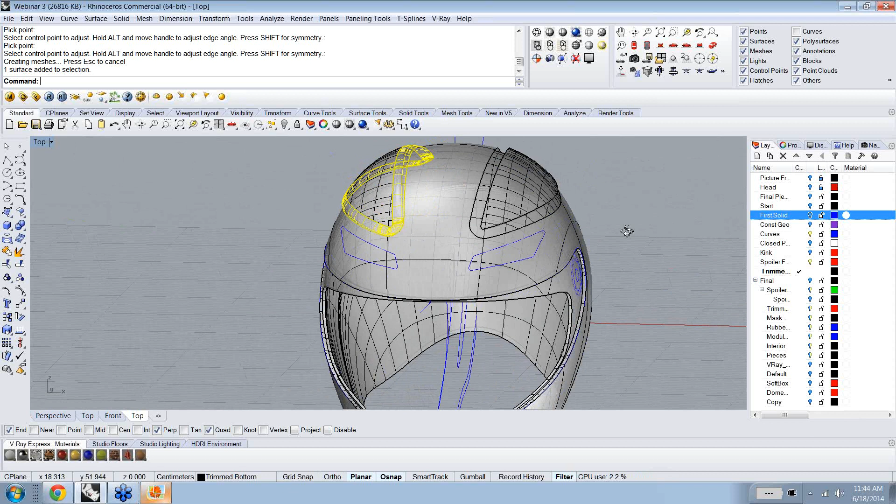And let's see what we've got here. You go off too. Okay. So here's my final piece. We're in the top view, so let me just go ahead and do my multiple views, and I'm going to wait for the render for a sec.

I have finished this up basically by doing a bunch of little details. I've got, you know, a sort of quick plush inside portion here. I have these which, if opened up, could be rendered as vents, but right now they're closed vents just for the sake of simplicity.

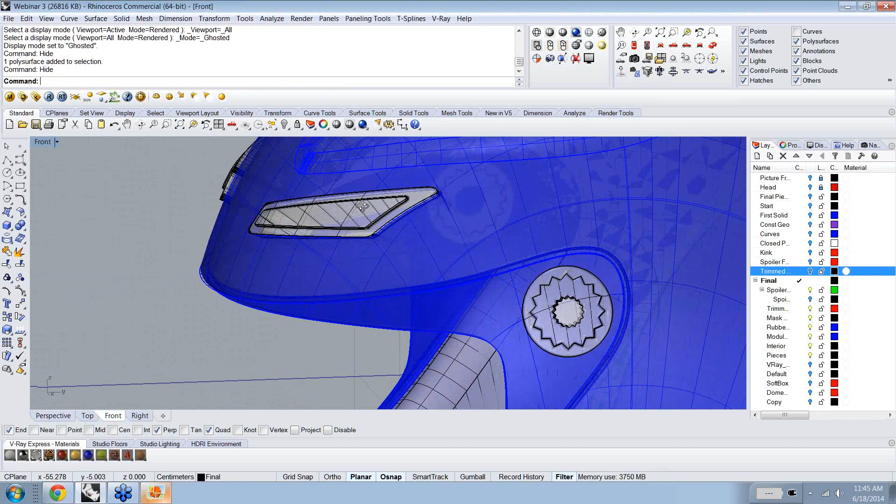I have this element here which is going to allow the mask to open and close. Another vent here, a little bit of a rubber rib around there, and then some screw elements here that will hold the spoiler in place. So not a huge deal, right? Just sort of basic.

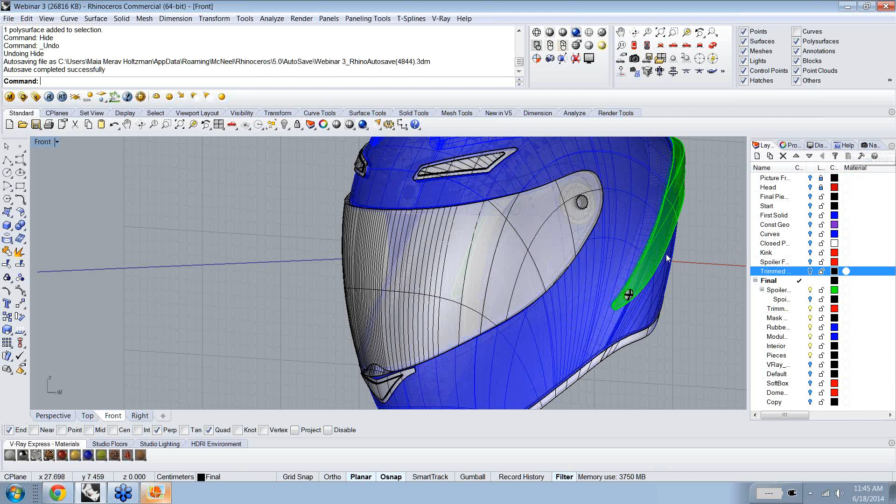And what I'm going to do now is go into my named views panel. And I just want you guys to really use that all the time if you're rendering. I think probably a lot of you do, but named views allows you to save whatever view you're in. So if I decide that that's perfect for me, and I hit Save As, I can save it as Render 2. Okay.

It's now going to give me a little icon here that says Render 2, and anytime I move my object around, if I click Render 2, it's going to bring me right back to that view. I can also easily delete that because it's not very nice. You get to your named views panel in a number of ways, but the easiest way is just by right-clicking and selecting it here under named views.

So I have my render view, and as soon as I click that, you'll see that my tab here at the bottom changes to be named render rather than what it was before, which was perspective. And I'm going to show you guys the easiest way to create this image without even making materials or changing settings or doing anything that would require you to know much about rendering.

If you haven't already done this and you have V-Ray, then you should go to V-Ray and download the V-Ray Express toolbar, which I have right here. It's this little icon that you can dock, and once it's docked, I just work with it there. If you don't know how to find it, go to Tools and then Toolbar Layout, and you'll see under V-Ray Express you have the option of bringing that out.

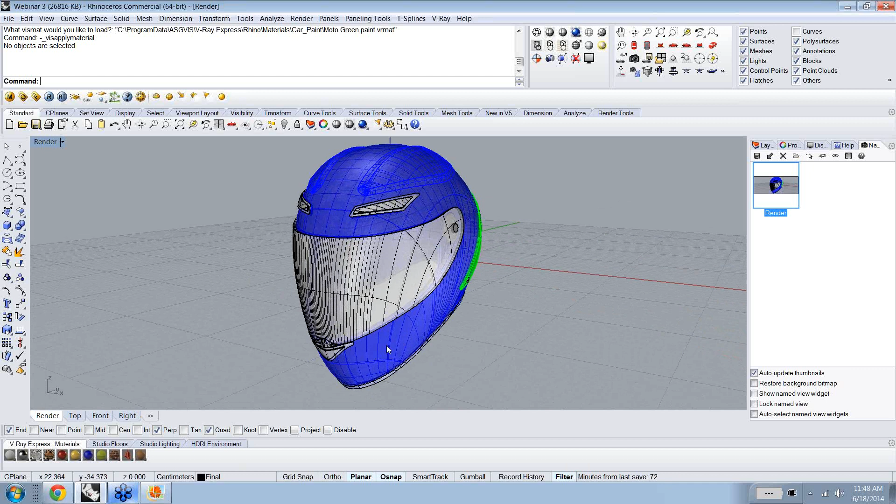Once I've applied all those materials, and it's really simple to apply the materials, I have my V-Ray toolbar up at the top there, and the M stands for material editor, the O stands for options, and the F is the frame buffer, which is just the previous image that was rendered.

So we can also place lights here, but for something like this, it's really simple just to select a studio floor from the studio floor options, which are multiple. We have a 360 degrees up until just a simple disk. In my case, I've selected the soft disk studio wall, and if I go into my layers, I can turn that on, and you'll see what it looks like. It is somewhere around here. There it is. Okay.

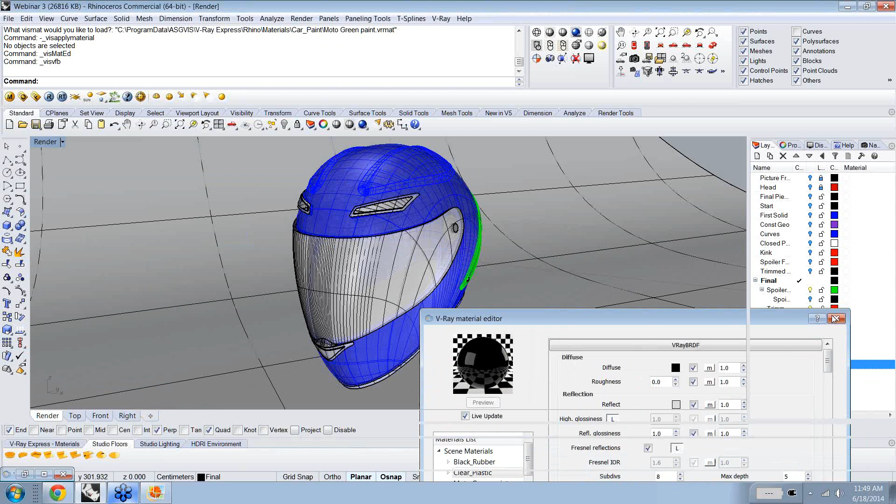Now, with these, you can move them around. Let me just close out my materials for a sec. They're not placed with any sort of specificity other than I think they're centered, but you can move this around, adjust it height-wise by using your gumball up and down, in and out. And the further away from your object, the reflection is going to change, obviously, from the lights.

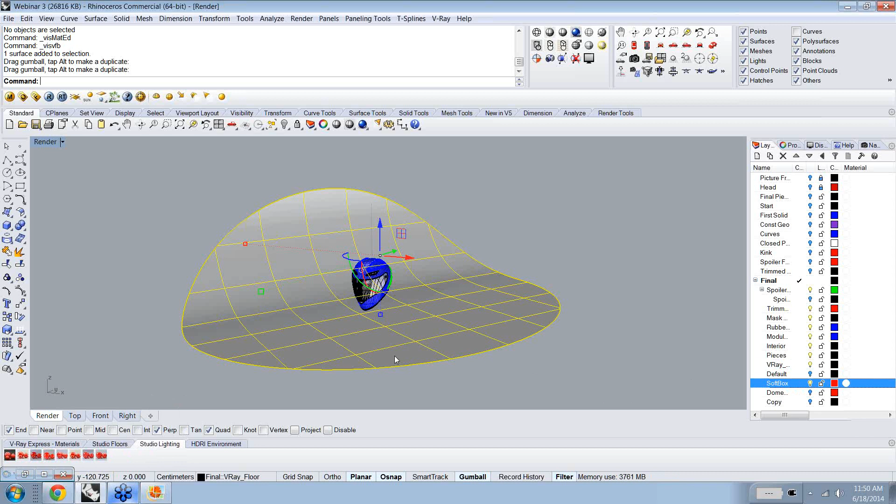And then I'm just going to really quickly show you guys that we have lighting options. So all of these lighting options here are going to give you different results. And you can see these very tiny icons are showing you the color of the background, etc. But if I turn on the one that I have chosen, which is my softbox car studio, let's just select it here.

You see that they've just set up lights for you in advance, basically. So rather than you having to have the knowledge of how to set up the lights to best illuminate your scene, these guys have done the work for you, and you can just go ahead and select one of these studio lighting options and illuminate your scene.

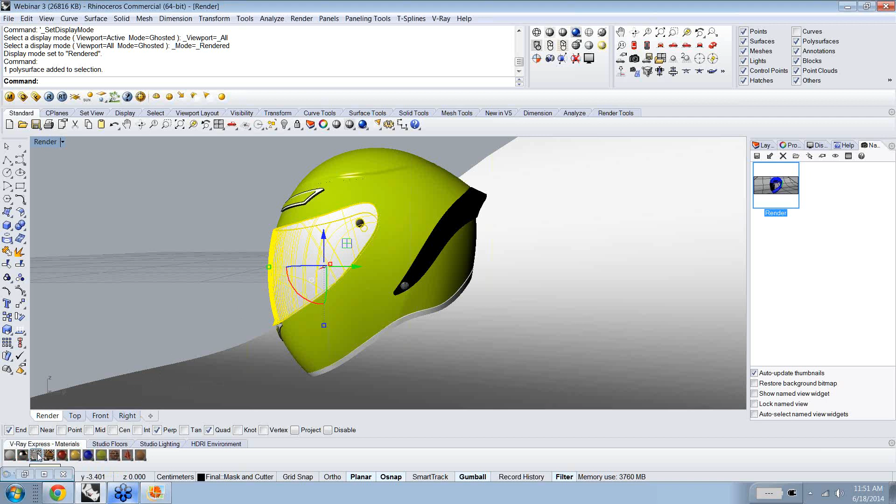So I'm going to go ahead and go into my rendered mode now. I'm going to actually go back to my named views here. You can see that I haven't applied all the materials. The clear plastic material will actually look black because black is transparent. So I would go here and I would say clear plastic, click it twice, and then for all of these

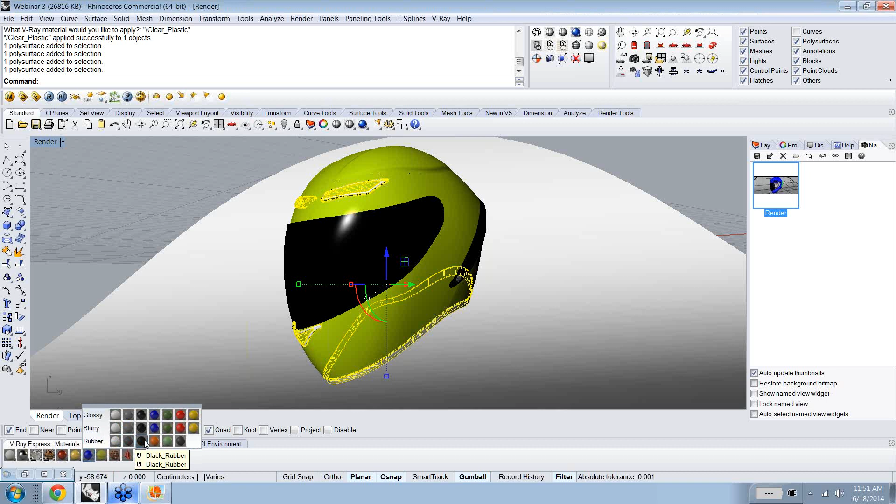materials which I want to be rubber, polysurface, polysurface, polysurface, and polysurface, and then this base piece right here, I'm going to go to my plastics, and I'm going to go to black rubber. Okay, and now I'll just go back to my render. Two more things before I start answering questions, and I'll just let this render out.

I'm going to open up my V-Ray options panel here, and I'm going to tell you that in this particular case, I'm not doing a single thing to change the settings. For the render that you guys saw at the end, which is bigger than the one I'll do now, I didn't do a single thing to change the settings. I just literally hit render. But there are a couple of things that you will want to know at least how to access, and one of those is the output size, which is in this output area right here. You can adjust your width and height of the actual resolution of your image here.

The other thing that I love, which I think everyone should do if you have more than one computer, is the distributed rendering. With your V-Ray license, you're able to place the license on more than one computer, and you can search for other computers that have V-Ray on them as well, and they will use those other computers to make basically a faster render engine. So if you've ever heard of a render farm or you've seen render farms, you can create your own mini render farm by clicking here, looking for the IP address of your other computers, and then clicking distributed rendering on

right there. Okay. Then once you've done that, for the presets, I say interior preset, very high quality, check, and close that, and then I'll go ahead and hit render. Boom. And it will start to render. And this rendering took about 10 minutes.

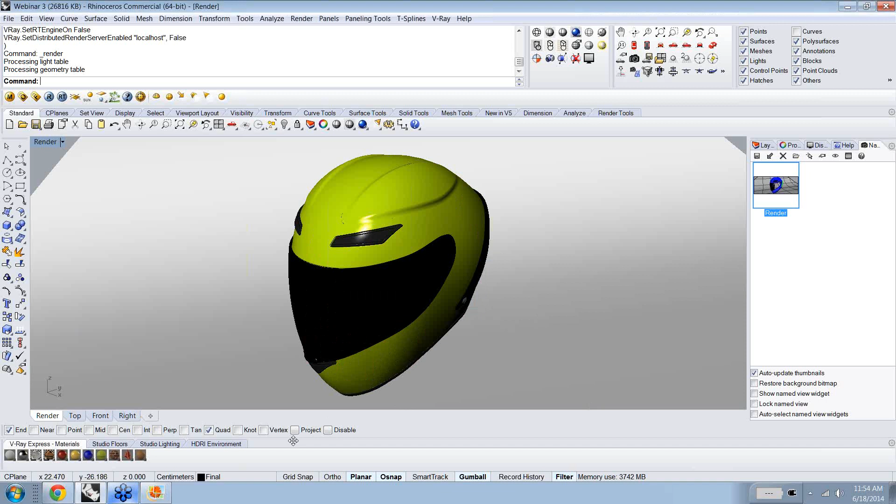In the meantime, I'm going to pass a couple of questions live so we can address them. Okay, could the groove in the top of the helmet be done with a pipe, a curve to size and split its surfaces?

The separation between the two surfaces that then we're going to make a blend surface, if that's what you're talking about. Yes, I think so. The difference is that when you make a pipe and you have it bent at that sort of an angle, often the surface starts to become less workable. So you would have to be careful about the sort of angle that you were piping.

All right, question number 2. Would you add an HDRI environment? Yes, always. The HDRI environments that are in V-Ray here are great for beginning to set up new types of much higher quality images. They have the studio environments, and then there's some outdoor and one indoor environment here. I absolutely, I did add one actually for this scene. I think I used Studio 4.

Great. By the way, it looks great. It looks so beautiful and easy. It's amazing how easy this is. That's why it's incredibly exciting to me that you don't have to know literally anything about rendering, because rendering is overwhelming and scary sometimes. There's so much information, but the only issue with this rendering that I have is right here. I can see a tiny little seam, and honestly, we really do go in and fix those things up in Photoshop most of the time.